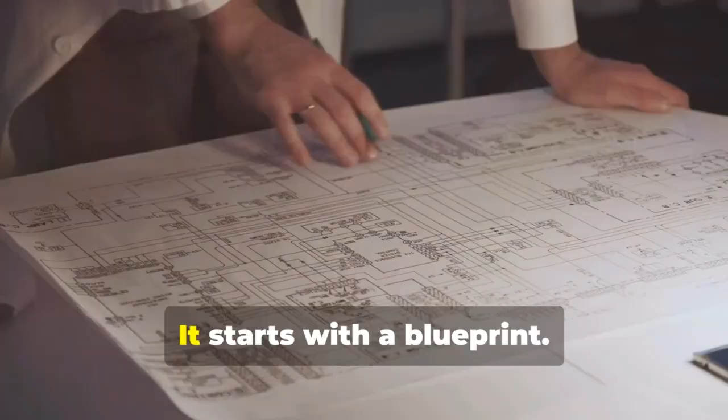Shipbuilding is like a giant puzzle. It starts with a blueprint. This blueprint is a detailed plan. It shows every part of the ship. Engineers carefully design each section. They think about the ship's purpose. Will it carry cargo? Will it transport passengers? Once the design is complete, the real work begins.

Every ship starts as an idea. Someone needs to move something somewhere. This simple need sparks the shipbuilding process. First, naval architects step in. They are like the architects of the sea. Their job is to turn that idea into a plan. This plan is the ship's blueprint.

Not all ships are created equal. Each ship is meticulously crafted with a specific purpose in mind, and this purpose influences every aspect of its design and construction. Some ships are built for speed.

These vessels, like high-speed boats and racing yachts, are designed to cut through the water with minimal resistance. Their sleek aerodynamic shapes and powerful engines allow them to achieve impressive speeds, making them ideal for racing or quick transportation. Others are designed to carry heavy loads.

Cargo ships and tankers are built with robust structures and large capacities to transport massive amounts of goods and equipment across vast distances. Their design prioritizes stability and strength to ensure they can handle the weight and remain seaworthy in various conditions. The ship's purpose dictates its design.

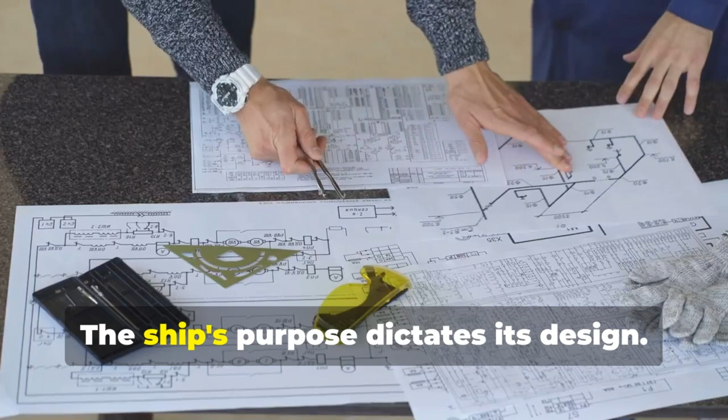Shipbuilders and engineers spend countless hours planning and discussing every detail, from the hull shape to the materials used, to ensure the vessel meets its intended function. This careful planning is crucial to creating a ship that performs efficiently and safely.

A cargo ship, for example, needs a large flat deck. This expansive surface area allows it to carry numerous containers, maximizing its cargo capacity. The design also includes features like cranes and other loading equipment to facilitate the efficient loading and unloading of goods.

This allows it to carry lots of containers. The ability to transport large quantities of goods in one trip makes cargo ships essential for global trade, connecting markets and economies around the world.

A cruise ship, on the other hand, needs a sleek, streamlined hull. This design not only enhances the ship's speed, but also improves fuel efficiency, making long voyages more economical. The smooth lines of the hull also contribute to a more comfortable ride for passengers, reducing the impact of waves and rough seas. This helps it move through the water

quickly and efficiently. Cruise ships are designed to provide a luxurious experience with amenities like swimming pools, theatres and fine dining. The streamlined hull ensures that passengers can enjoy their journey with minimal disruptions, gliding smoothly from one exotic destination to another.

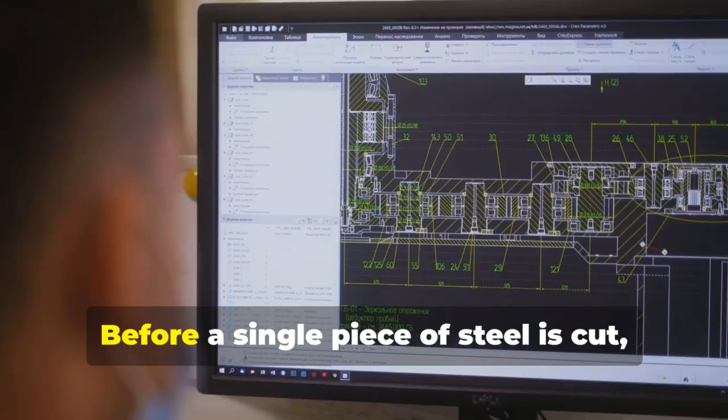Section 3. Virtual voyages: testing before building. Before a single piece of steel is cut, the ship makes a virtual journey. Using advanced computer simulations, engineers test the design. These simulations are like virtual sea trials. They subject the ship to various conditions. They simulate rough seas, high winds and heavy loads.

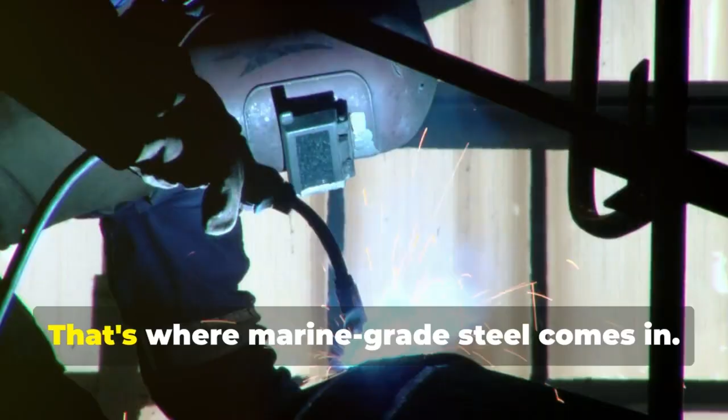Section 1. The backbone of giants: marine-grade steel. A ship faces relentless challenges at sea. Crashing waves, salty spray, and the constant pressure of water demand materials that can endure. That's where marine-grade steel comes in. This isn't the steel used to build houses or cars. It's a special breed, engineered for strength, durability and resistance to corrosion.

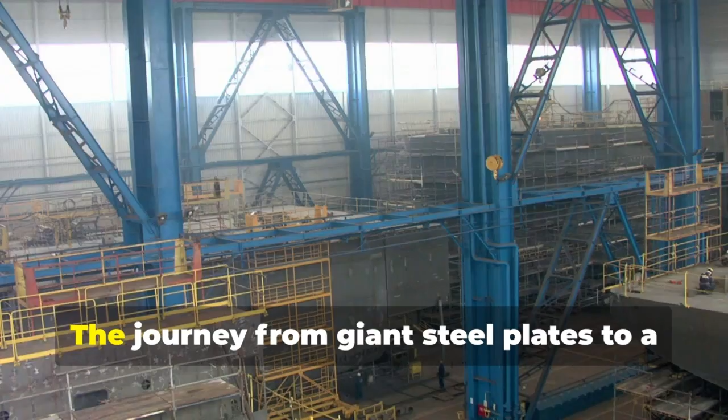Section 2. Precision cutting: shaping the future vessel. The journey from giant steel plates to a ship's hull is a marvel of precision cutting. Armed with advanced technology, shipyard workers transform raw materials into the intricate pieces that will form the vessel.

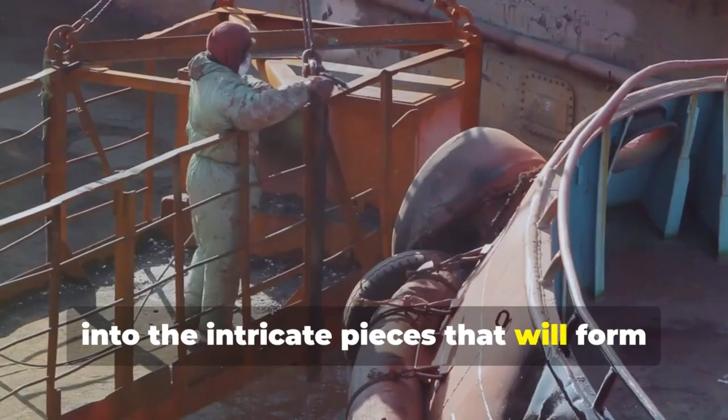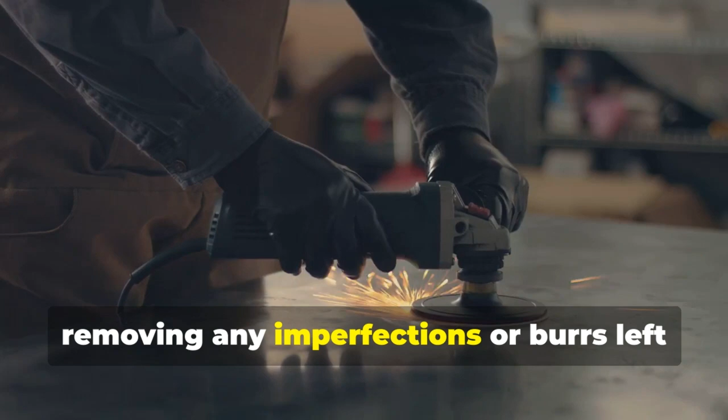Giant plasma cutters, guided by computer-aided design files, slice through the steel plates with ease. Ready to assemble, a symphony of preparation. Before the cut steel pieces are ready for assembly, they undergo a series of crucial preparation steps. First, the edges of the cut pieces are smoothed and cleaned, removing any imperfections or burrs left behind by the cutting process. This ensures a tight, seamless fit when the pieces are welded together.

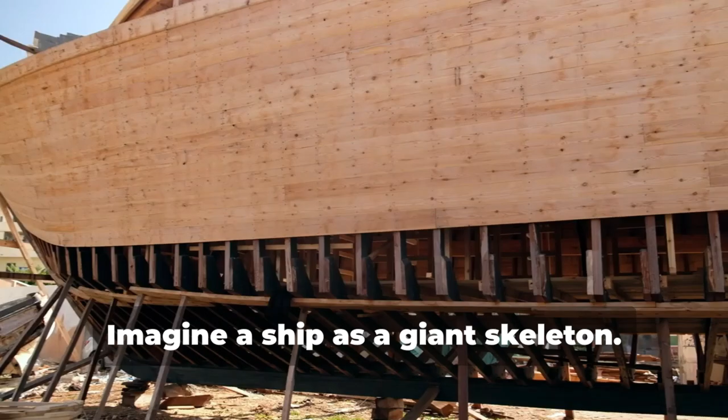Laying the keel, the ship's backbone. Imagine a ship as a giant skeleton. The keel is its backbone, the central beam that runs along the entire length of the vessel. Laying the keel is a symbolic moment in shipbuilding, marking the official start of the hull construction.

Block by block, constructing a giant jigsaw puzzle. Building a ship's hull isn't like assembling a car on an assembly line. Instead of piecing together small components, shipbuilders work with massive sections called blocks. These blocks, weighing tens or even hundreds of tons each, are prefabricated in a separate area of the shipyard.

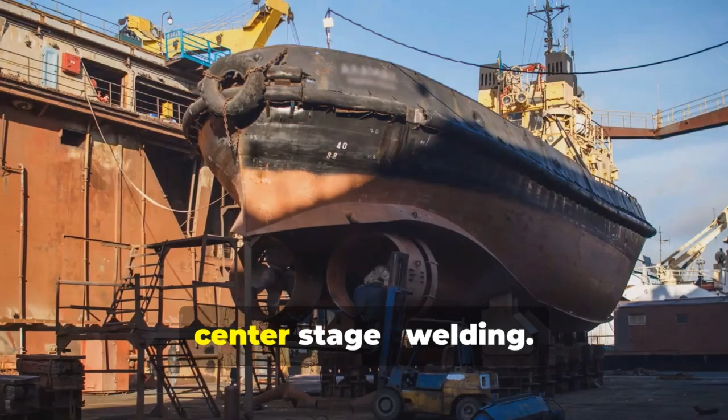Section 3. The dance of fire and skill, welding the hull's destiny. With the blocks in place, the true artistry of shipbuilding takes center stage: welding. This isn't your backyard welding project. It's a highly skilled trade, demanding precision, knowledge of metallurgy, and the ability to work in challenging conditions.

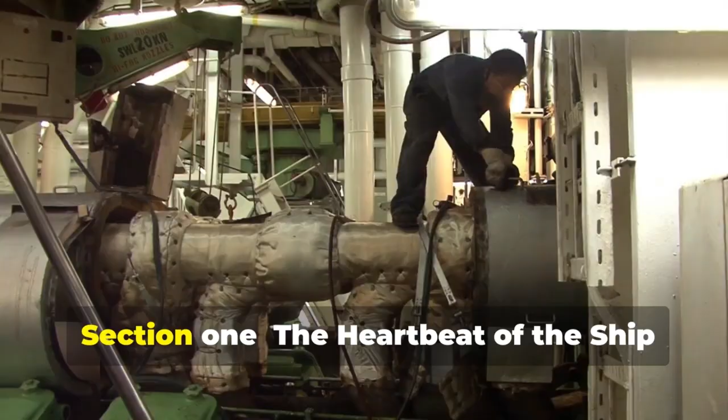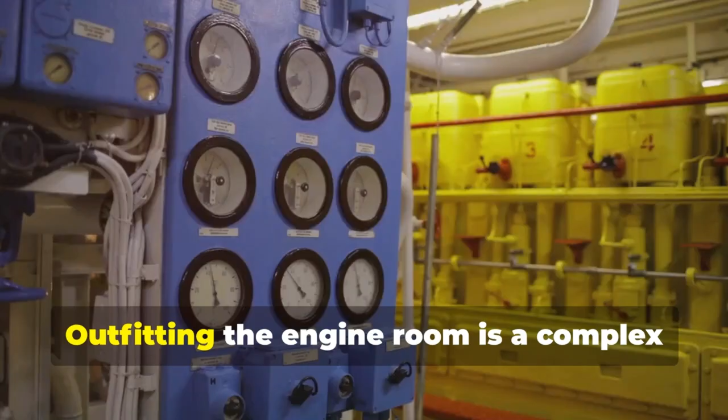Section 1. The heartbeat of the ship, powering the giant. The hull may be the ship's skeleton, but the engine room is its beating heart. This is where raw power comes to life, propelling the vessel across vast distances. Outfitting the engine room is a complex and meticulous process, involving the installation of massive engines, intricate piping systems, and sophisticated control panels.

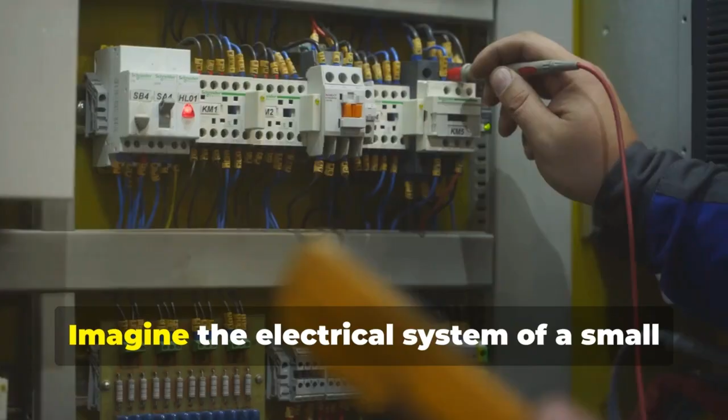Section 2. Nerves of steel, electrical and control systems. Imagine the electrical system of a small city. That's the scale of what's involved in outfitting a modern ship. Miles of cables, thousands of electrical components, and sophisticated control systems bring the vessel to life, powering everything from navigation equipment to lighting to communication systems.

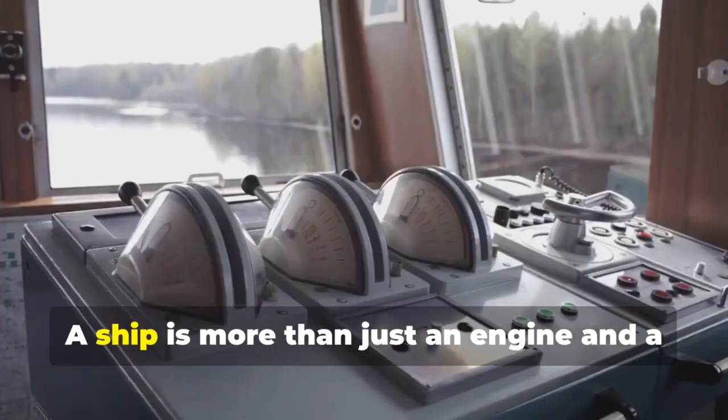Section 3. A floating city, outfitting for life and purpose. A ship is more than just an engine and a hull. It's a floating city, designed to accommodate the needs of its crew and fulfill its intended purpose. Outfitting the ship for life and purpose involves transforming the empty shell of the hull into functional and comfortable spaces.

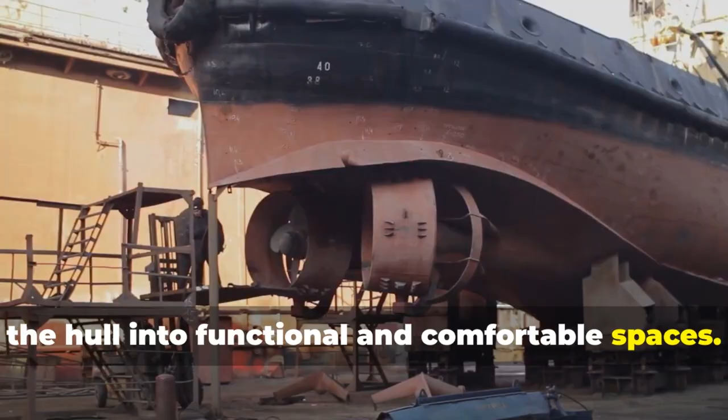Section 1. A coat of armor shielding the steel giant. In the world of maritime engineering, the construction of a ship is a monumental task, involving countless hours of labor, precision and expertise. But the journey of a ship doesn't end once it leaves the dry dock. In fact, that's just the beginning of its life at sea. A ship's journey doesn't end with its construction. As it embarks on its maiden voyage, it faces the vast and unpredictable ocean.

The open sea is a realm of beauty and danger, where the elements are both a ship's greatest ally and its most formidable adversary. The real battle begins at sea, where the relentless assault of saltwater, sun and marine life can quickly take a toll on even the strongest steel. Saltwater is particularly corrosive, eating away at the metal and weakening the ship's structure over time. The sun's UV rays can degrade materials, while marine life like barnacles and algae can attach themselves to the hull, increasing drag and reducing fuel efficiency.

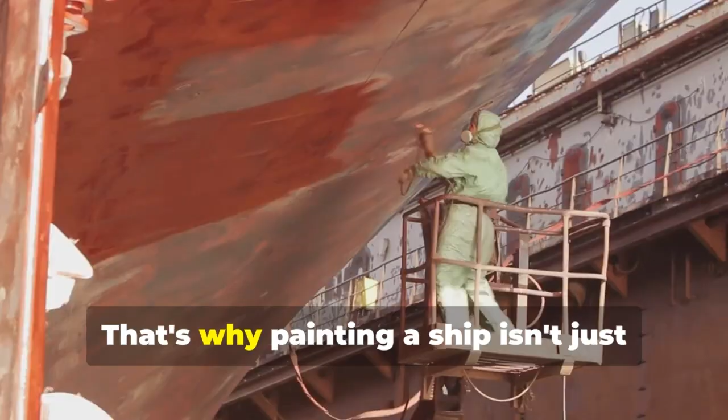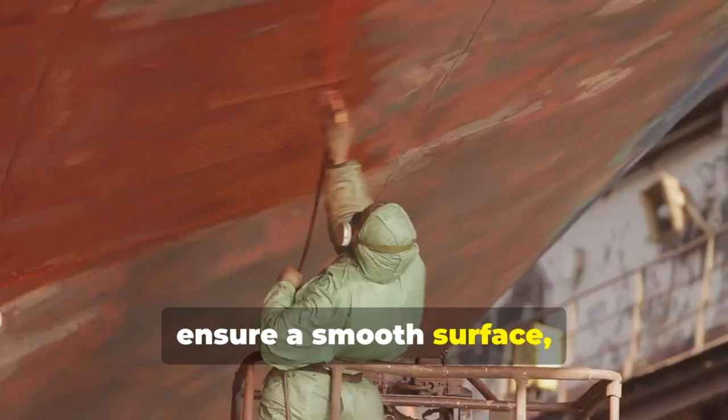That's why painting a ship isn't just about aesthetics. It's about applying a coat of armor, a protective barrier against the elements. This process involves meticulous preparation, from cleaning and sanding the hull to ensure a smooth surface, to applying multiple layers of specialized marine paint. Each layer serves a purpose, from preventing corrosion to reducing the growth of marine organisms. The final result is a ship that's not only visually striking, but also fortified against the harsh conditions of the sea, ready to face the challenges of its journey with resilience and strength.

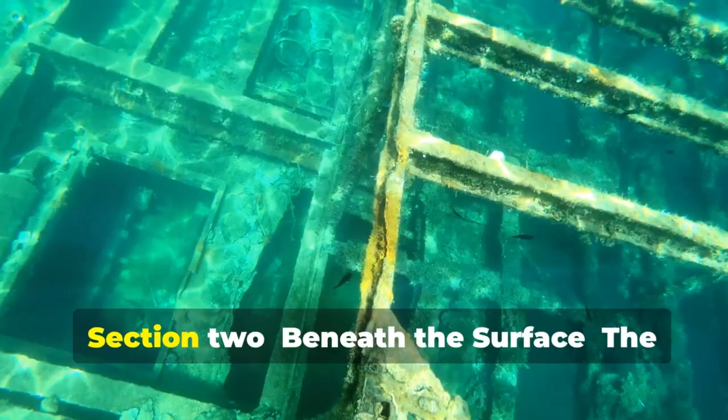Section 2. Beneath the surface. The science of anti-fouling. While the paint above the waterline protects the ship from the elements, a different battle is fought beneath the surface. Marine organisms like barnacles, algae, and mussels are constantly trying to attach themselves to the hull. This accumulation, known as fouling, creates drag, reducing the ship's speed, increasing fuel consumption, and even damaging the paint.

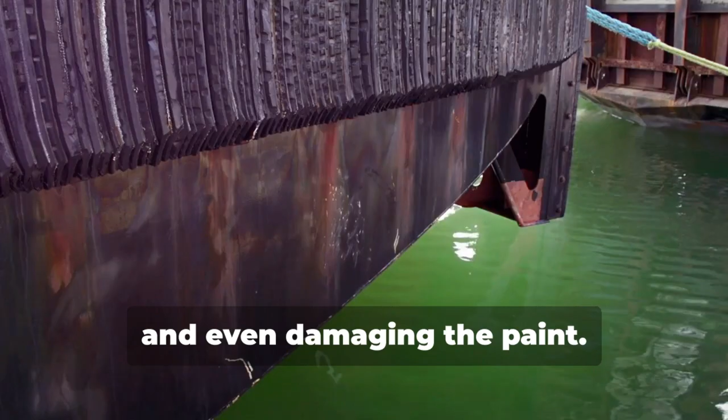From dry dock to open water, a choreographed descent. The day a ship first meets the water is a momentous occasion. It's the culmination of months or even years of planning, design and construction. But before the champagne bottles pop and the crowds cheer, the ship must navigate a delicate and carefully choreographed descent from dry dock to open water.

A ship launch is more than just a technical milestone. It's a time-honored tradition steeped in symbolism and celebration. For centuries, shipbuilders have marked this occasion with ceremonies and rituals, invoking good luck and safe voyages for the vessel and its future crew.

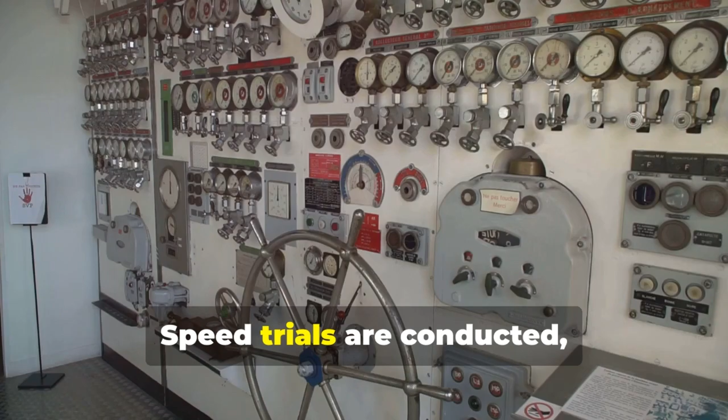The shipyard fades into the distance as the ship, fresh from its launch, embarks on its first true voyage: sea trials. This isn't a pleasure cruise, it's a rigorous examination, a test of the vessel's mettle, and the culmination of countless hours of design, engineering and construction. As the sea trials progress, the intensity ramps up. The ship is pushed to its limits, its systems tested under increasingly demanding conditions. Speed trials are conducted with the ship racing across the waves, its engines roaring to determine if it can achieve its design speed.

From a simple blueprint to a steel giant conquering the waves, the journey of shipbuilding is a testament to human ingenuity and our enduring connection to the sea. We've witnessed the meticulous design, the raw power of shipyard construction, the intricate dance of outfitting, and the rigorous tests of sea trials. Each step a testament to the skill, dedication and collaboration of countless individuals.